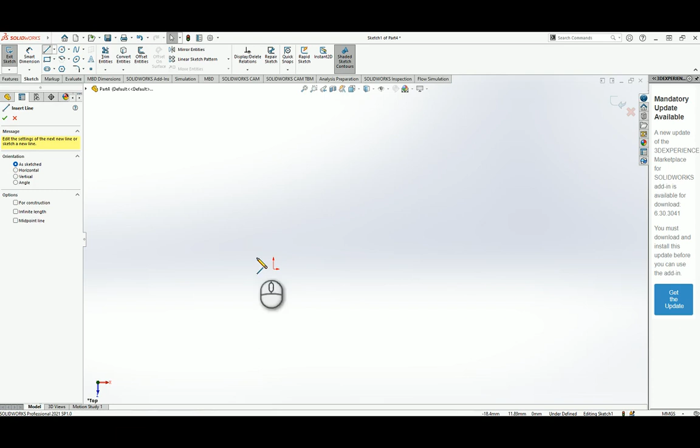Right, so we want a new file now. This is to actually do the actual problem, the tapered plate with the hole in it. So from simulation, we went into sketch, new sketch. So we're just drawing the top view of the tapered plate. So we started an arbitrary line,

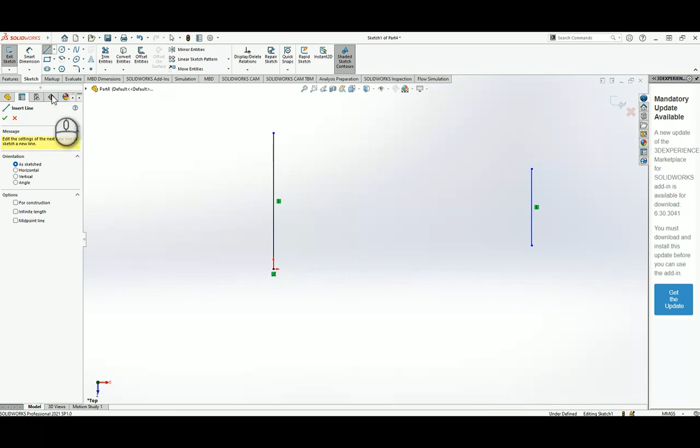and there's another line somewhere along here. Right, so the little yellow with the vertical line through it, next to the cursor there, it says this is a vertical line, and that's the constraint here. Right, so again, we could go line, we could make it a construction line, by clicking that tick over there.

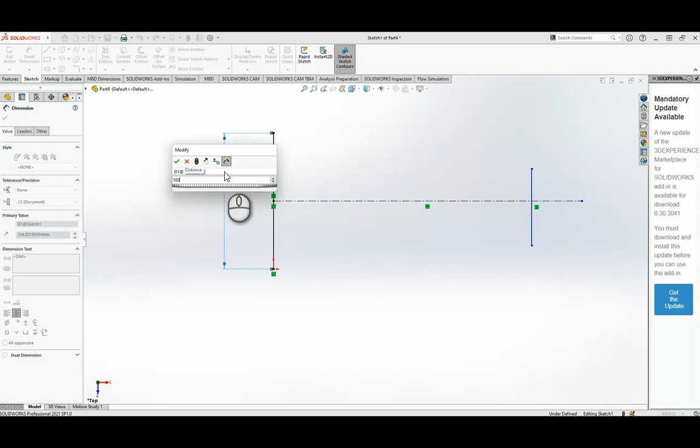Right, so we go to the midpoint, and we could connect it. Let's go straight across. Then we could dimension. So we could click dimension, we could make this 100. This one, distance between the two lines was 200.

And from the end to the midpoint, well, it's 50 millimeters, that end was, right? So we go 25 and 25. And there's several different ways you could do this also, but

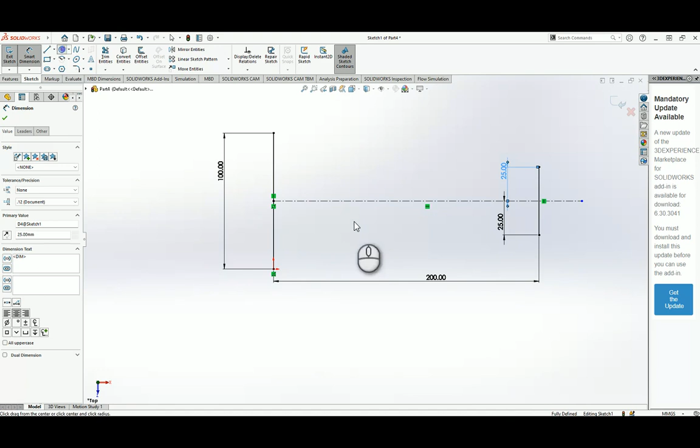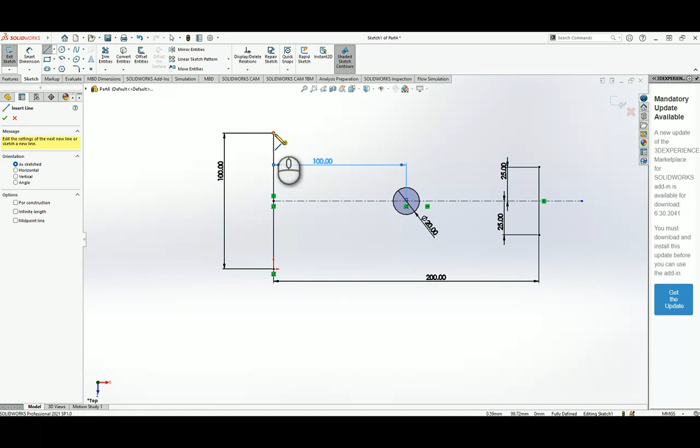right, and the circle is somewhere in the middle here. Again, we could do our smart dimension. It's 20 millimeters, and it is 100 millimeters from the end. Right, so now we just connect our lines. Right, so there we have our top view of the plate, exit sketch.

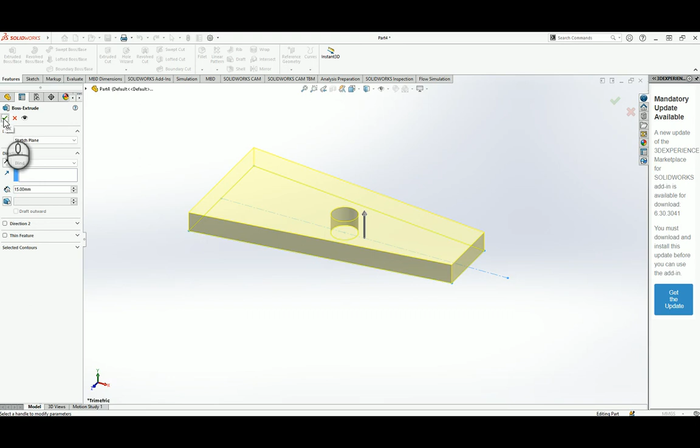Now we could go back to features and extrude. Right, we know it was 15 millimeters thickness. So there we have our plate. Right, so if you want to just make sure everything is correct in terms of our dimensions, we could go and evaluate over here. And you would see evaluation tools. Of course, we just want to measure, so we click on the measuring tape.

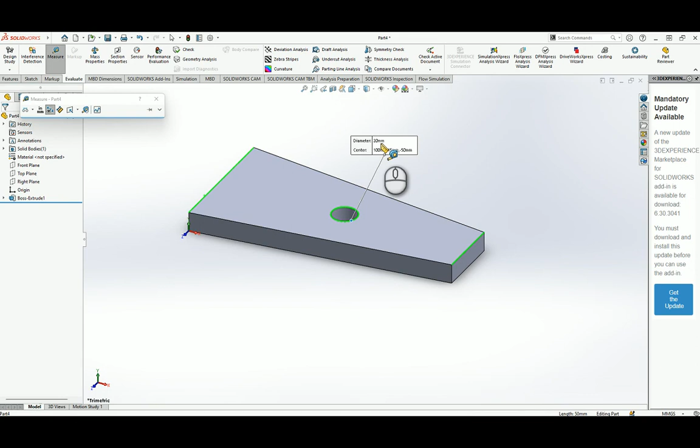And we know that the end was 50 millimeters, the shorter end, so we could just click on the line and we'll see 50 millimeters. The line on the back was 100, right? And we could see the red line, the distance was in fact 200. Diameter was 20 millimeters, which is what we had, and the center is at 100 millimeters.

Right, from the edge. Right, so the center distance to the end was 100, which is at the middle, what we had. So this is one way of confirming our drawing before we proceed to the analysis portion.

For the analysis, again, we went through this just now. If you're not seeing simulation, you click simulation up here and wait some time and you will see this tab come up here. Right, so we click on simulation, new study. We will name it static, because it's a static analysis, static plate or whatever, right? And make sure static is selected over here, and then OK.

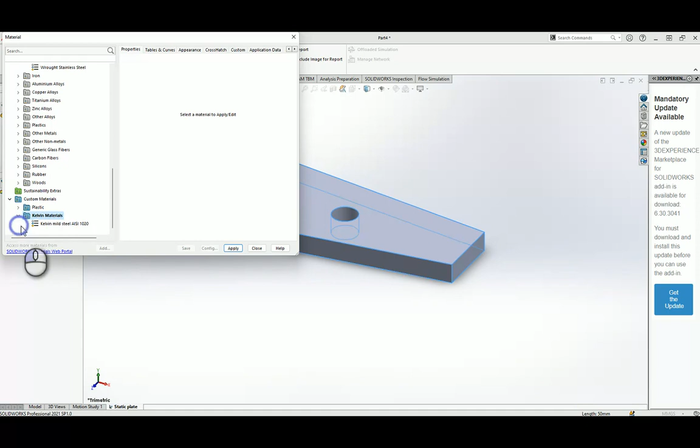And then we go through the same process. We have our materials. Right, so this is your custom material. It will remain here from the pre-analysis. Apply. Then the ends are fixed, so it's fixed geometry. Same procedure again. And then our loads.

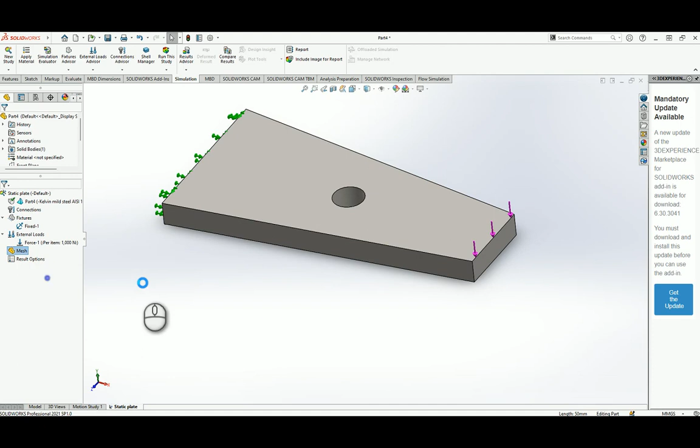Right, so the load is on a line. Selected direction, we want it in the vertical, so we click a vertical line. Right, and the value of the force is 1000. Right, next step is our mesh. So we will do our mesh study now. Right, so we'll go and create mesh, and we'll go down to a very coarse mesh.

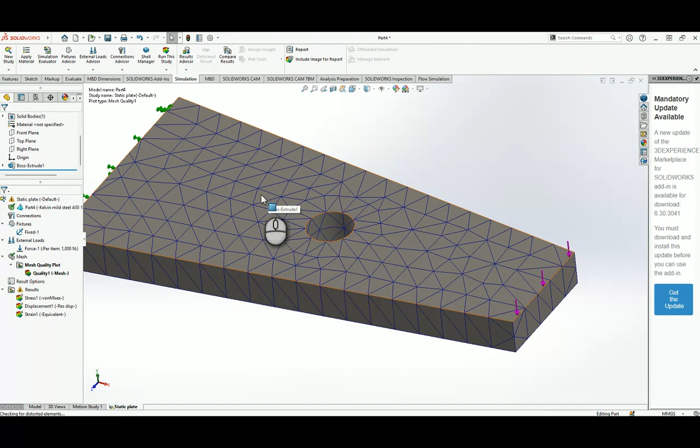Right, so it's a very coarse mesh. And what we will do now, we will use this region around here as a means of seeing how our stresses are convergent. Right, so we have the coarse mesh. Right, so what we're gonna do, we're gonna keep remeshing this and keep getting finer and finer and see, do our mesh study.

Right, so after we do a fine mesh, we click run, and this is our von Mises stresses. Right, so we could see that the maximum stress, of course, we expect it to be around the hole, stress concentration. So you notice the stresses on the sides in terms of the maximum stress. Right?

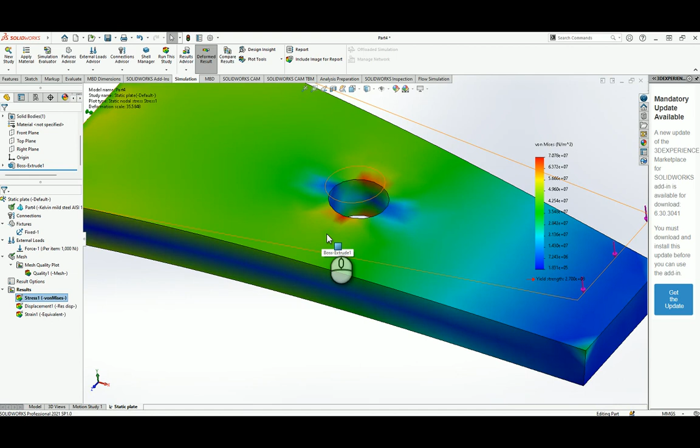If you want to have a look at the sigma x values, well, then we come on results again, define stress plots, and it's in the x direction, so keep it at Newton per meter squared. So this is the stress in the x direction. So high regions of stress are in the back here, where it's fixed, and around the hole as expected.

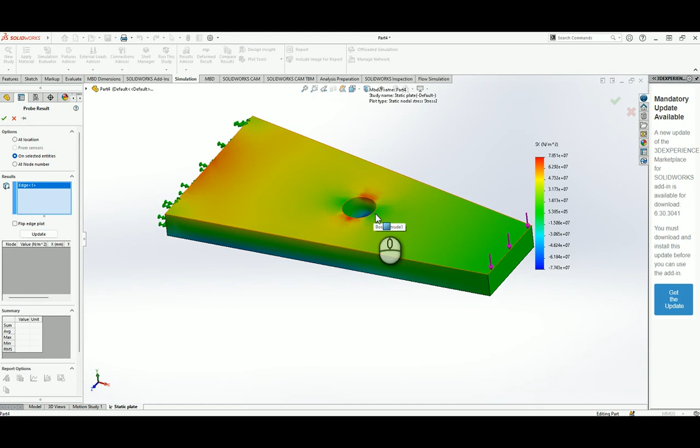But if you want to get an idea of those high stresses, you go and right click the stress, click probe. Again, select entity, so we click around the hole, update. So these are the values of the stress around the hole. Alright, so it's hard to visualize these numbers here.

Let's expand this. Alright, but you can see here the average, you could see the maximum, you could see the minimum. Alright, so the maximum stress is 78 megapascals. You can also click the little graph icon here, plot, and that will actually plot the distance as it goes around the hole, parametrically, meaning that it starts at one end and goes around.

So from here to here is one loop around the circle, and you can see how the stress fluctuates. Alright, so again the maximum would be at the edge there, the 78 megapascals thereabouts.

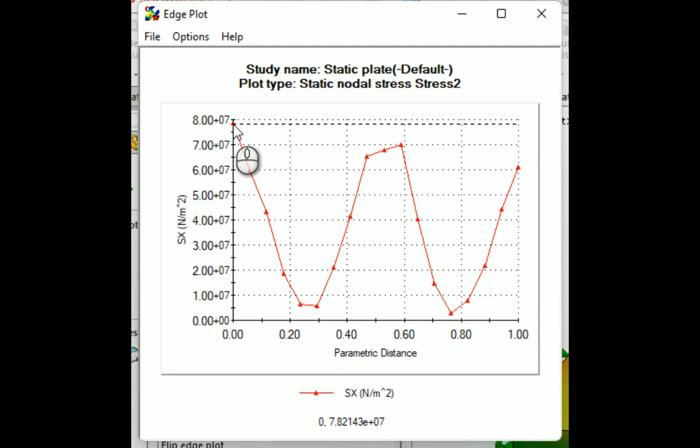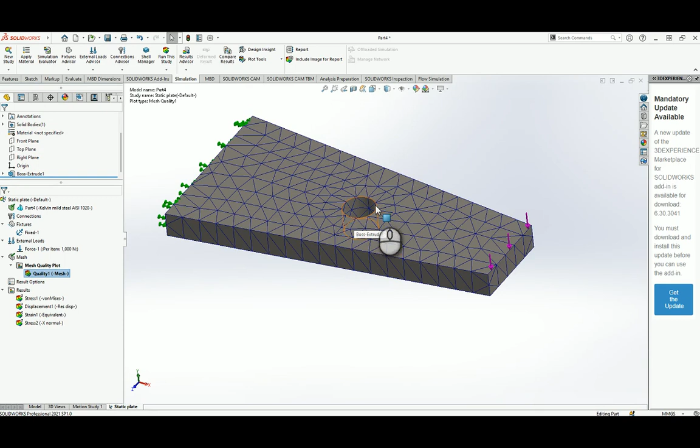Now to do this mesh study, we could actually document this value here, 78 megapascals. Alright, so we plot the mesh, right click show, and we could do something simple. We could count how many elements are on here. So this is about 7 elements, and then we run the analysis, and we just document what is the maximum stress, and we keep doing that.

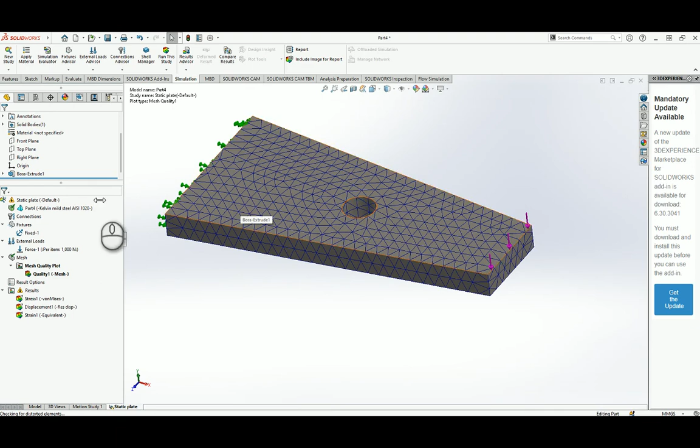Right, so we delete, unfortunately we have to delete it to do it over. We come on mesh, create mesh. Right, we want to override the mesh, so we increase the fineness of it. So we could come up to probably the middle here. Right, so we kind of increase the amount of elements. Again, we come here, we run. Right, and then we do over the same results process.

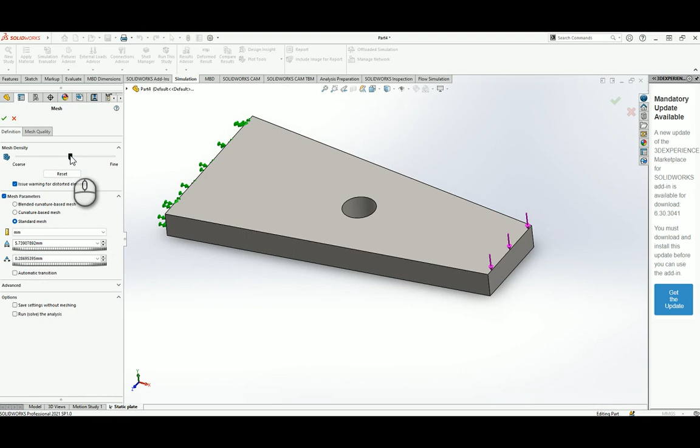Alright, so I'll show you a result of what I did. You keep repeating this process until you reach all the way up to fine. So you could stop here, do it again, stop here, do it again, all the way up to fine. Alright, so this here is just a small mesh study. So this is the number of elements around the hole, and this is the maximum that I had calculated. I just roughly counted how many elements, and this is the value of the maximum stress. So it goes 77, 72.

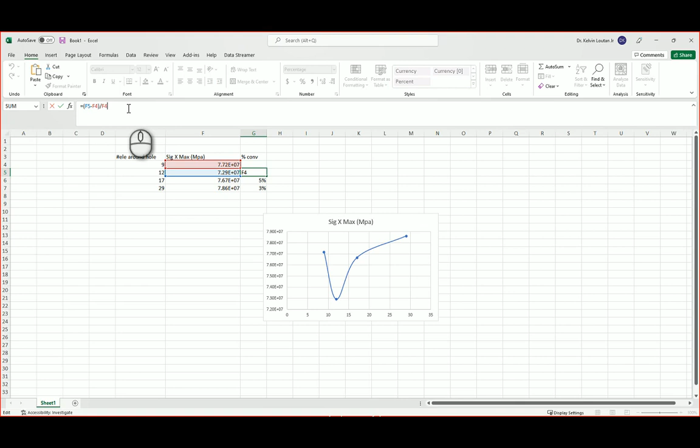Right, so I plotted that stress versus number of elements around here. So this is what we call a mesh study. So you could see as the number of elements increases, this was sort of an anomaly here, the value of stress would increase, but the difference in increase every time will get smaller. That is measured here by the convergence. So the convergence is really your new value minus your previous value divided by your previous value. So we want to put a percentage to how much it's changing every time we remesh.

Right, so you can see it's 5%, 5%, and then it goes down to 3%. So I had maxed out how fine it was. If it was capable of putting more elements, then it would have gone down to maybe 2.8%, 2.5. So we reach a point where the line is just starting to slowly level off. So we can make a decision at this point and say, okay, at 17 elements around the hole, the convergence after that goes to 3%. So we could stick to this 5% here and use this figure of 17 elements. So 17 elements is a good enough number of elements around the hole.

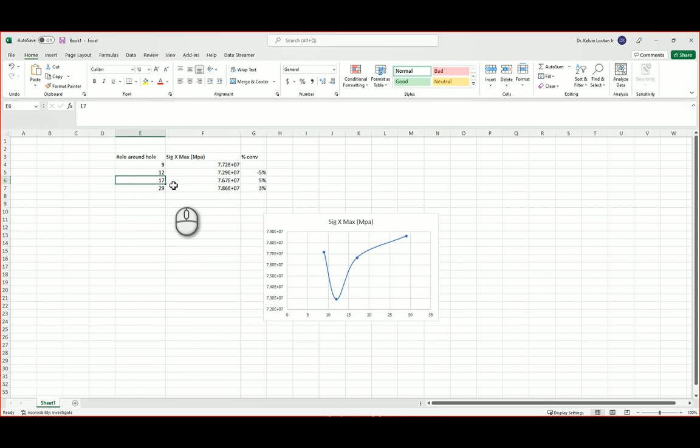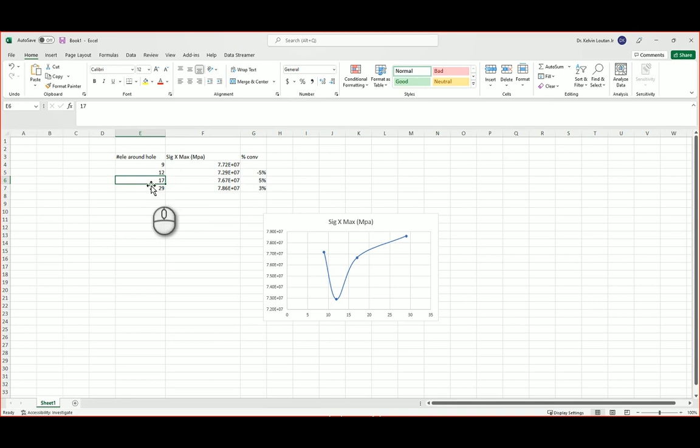If you go beyond that, then of course it will be even more precise or closer to the actual value, but you'll be using more resources on the computer. Right, so the 17 elements is good enough. So that is how we would document this. We would show this plot in our report.

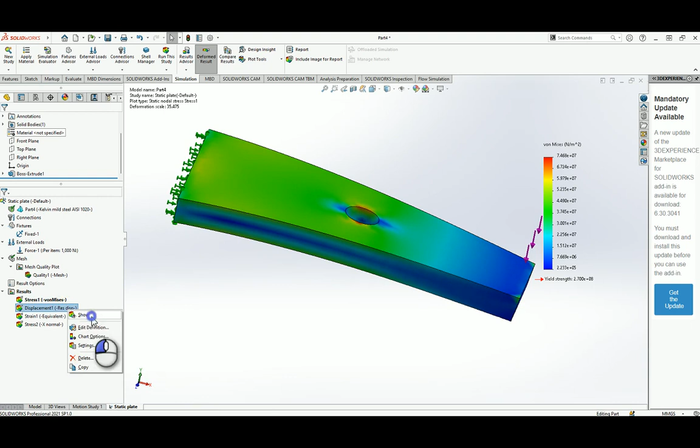Right, so coming back to our problem, we could say that this is the solution. This is our stress plot, and it is below the yield strength, even the highest regions, even though we have the stress concentration. Right, we could look at the displacement. Displacement is 0.56 millimeters on the end here. And then of course it is 0 where we fix, which is represented by 1 by 10 to the minus 30, which is 0.

Right, so that is using the finite element analysis tool in SolidWorks. And as we move on throughout the semester, we'll be using more advanced features. So the task now is to see how you could actually write up a report for this part using the pre-analysis, the types of elements used, the results. To get more information on your mesh, you could right-click your mesh, click mesh details, and you could see things like total number of elements, mesh quality. These are things that you could document for your report.

Now, do not copy everything and paste it in a report. Everything in a report needs to have a purpose, and you must understand what it is you put in. So you will put down things like your element size, total number of elements. Those are good statements to put in terms of describing your mesh from SolidWorks. Mesh type is solid mesh. You could see here also the mesh quality is high. As you're changing your mesh, these values are going to change. Right, so that concludes the activity for today.